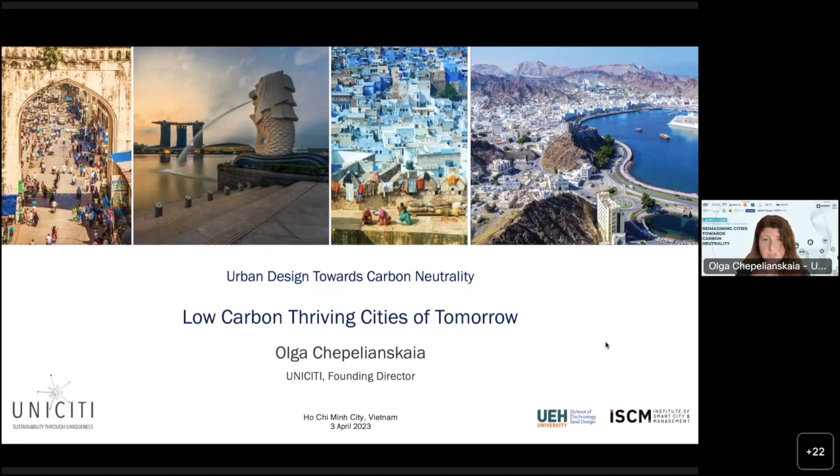To give you an idea of where our experience is coming from, we at UNICITI have worked with about 40 countries at the national level. We started working at the national level before we started working with cities in 2010, and we've covered about 30 cities now across Asia and a little bit in Africa and other places in the global south. At UNICITI, we stand for uniqueness in cities - this is what our name means.

We also have large experience in climate change, both adaptation and mitigation. While working with different United Nations agencies and development banks such as the Asian Development Bank, we could really see that looking in depth into the local context of each city allows it to strongly adapt to climate change, strongly reduce carbon emissions, but also have a number of very valuable co-benefits, such as strong local identity, which attracts tourism, attracts socioeconomic opportunities, and connects people to the city.

These are the points I'd like to develop today. Starting with an important piece of news you may have seen: about 10 days ago, the Intergovernmental Panel on Climate Change released a synthesis report where scientists identified that today the temperature has already increased by 1.1 degrees compared to pre-industrial levels.

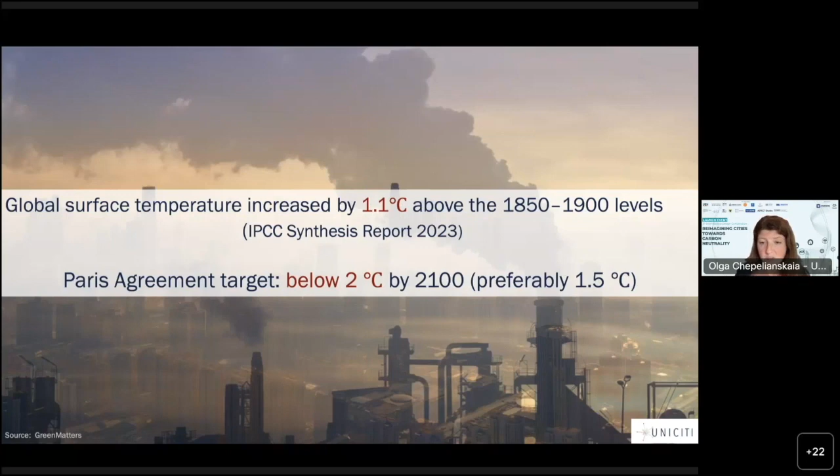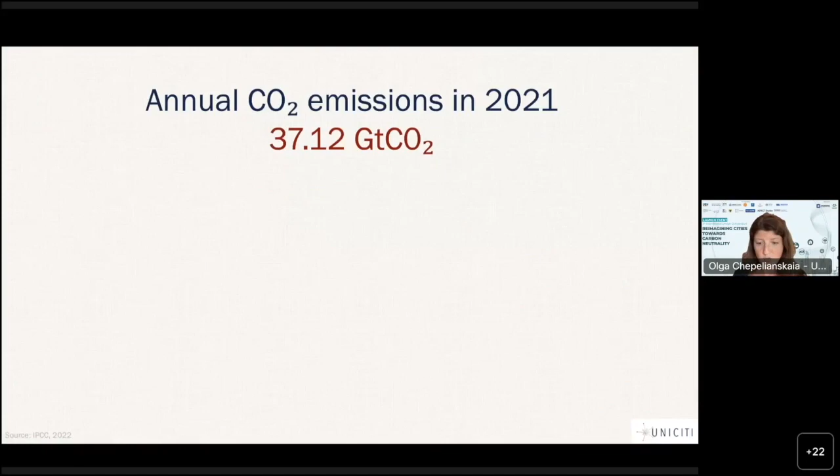Now, where do we stand in terms of emissions? In 2021, the world emitted 37 gigatons of CO2. Believe it or not, the buildings and construction sector accounts for nearly 40% of it - more than a third of all these emissions. This really places us, when we talk about low carbon cities, at the center of meeting the Paris Agreement.

It depends on us, on our sector, to a large extent, to achieve it. Going a little deeper, if you look at just the manufacturing of conventional building materials - typically concrete, cement, glass, aluminum - these materials alone represent over 10%, 11% to be exact, of global CO2 emissions.

Now, where I'm heading, and I'll highlight it later, is that when we talk about low carbon cities, we often want to talk about operational energy in buildings - essentially looking at energy efficient appliances, capturing indoor temperature so there's less contact with the outdoors and we use less air conditioning. All these things are important, but they're not sufficient, because until we continue building cities the way we build them today, we are really not on track to reach the international targets.

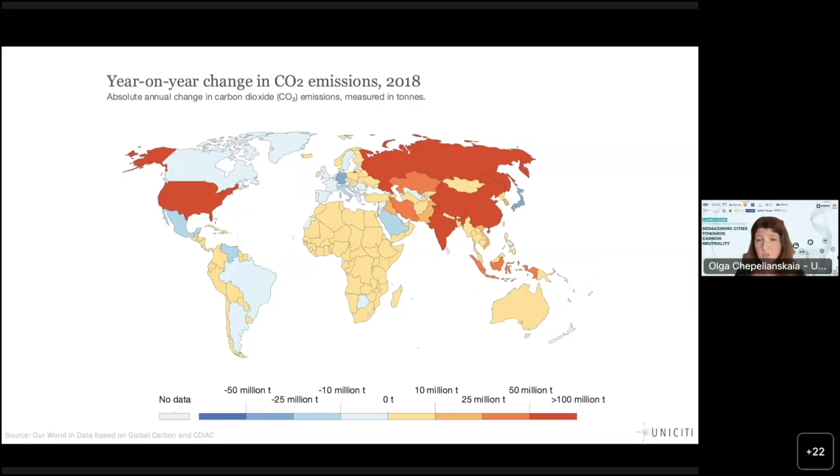Now if we look at Southeast Asia specifically, we see that Indonesia and Vietnam are the countries whose emissions are growing the fastest. So some conclusions to take here in terms of how action is important.

Going a little further into that, Asia as of now is about a quarter of global emissions, but growing very fast. Southeast Asia is about 8%, because of course India and China are the biggest contributors, along with Russia, if we associate it with Asia, since Russia is usually looked at as both Asia and Europe.

Importantly now, since we have a focus on Vietnam today, we can see that Vietnamese emissions over recent years have grown tremendously fast and have become the highest per capita in the entire Southeast Asian region. See how sharp the graph is. There is a little decrease during COVID, but that's a world trend, not related to specific efforts of Vietnam in that case.

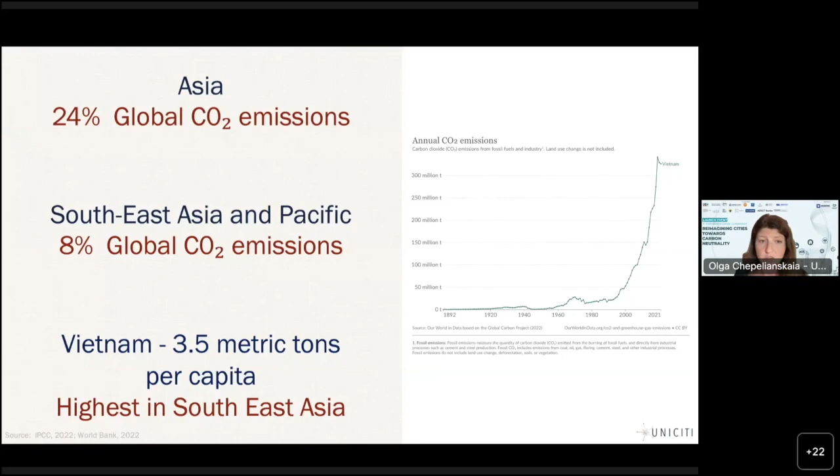This means Vietnam really has an important role to play today in contributing to meeting international low carbon targets. In fact, Vietnam has already undertaken a number of strong pledges, such as the National Climate Change Strategy to 2050, where at the recent COP it pledged to become net zero by 2050.

Here it is very important now to downscale this big strategic target to sectoral targets so that the strategic target can be met. Specifically coming to cities, cities are growing fast in Vietnam, as they grow fast in most Asian countries today. Here is an important data set that you may have seen already on our UNICITI pages or elsewhere, which is quite revealing.

While cities cover only 2% of the world's territory, they are responsible for 70% of global CO2 emissions. So for Vietnam to meet its strategic net zero target by 2050, it's very clear that cities are going to play a critical role in this objective.

Now coming to really one of our favorite topics at UNICITI, because we consider it critical for us to reach those targets. As I said, very often we focus on operational energy. But now let us look, when we talk about the building life cycle, how many opportunities are there for emissions to happen?

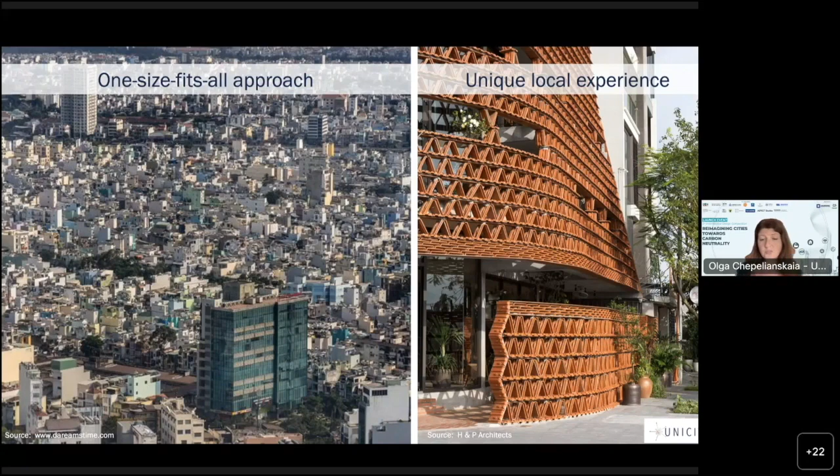I'll quickly walk you through 3 levels of a low carbon city: building level, neighborhood level, and municipal national level. So what can we do at a higher level to support the first two levels? The building level.

As I already started talking about, building materials are really a critical step. We think that without concrete, we can't go anywhere. But until the 60s, many buildings were built without concrete. Over the 20th century it kept increasing, and now we are completely dependent on it. It wasn't like this before. It doesn't have to be like this all the time.

If you look at bamboo, which is extensively growing in most of the global south, it has tremendous potential. You may have heard that countries like Canada and the US are now actively introducing timber into construction and building codes because tests have shown it is safe. I'll touch upon that in a minute. Bamboo actually grows much faster than most of the hardwood you find in Western countries, so this is one potential to activate.

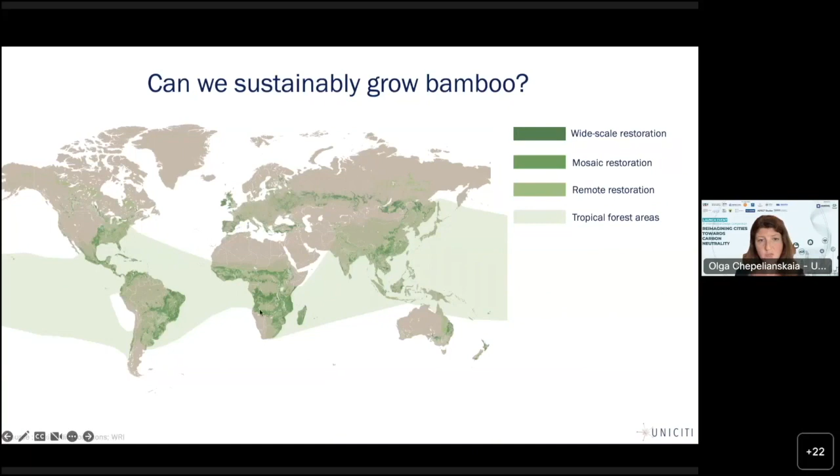Just with soft bamboo, we can't build higher than maybe 1, maximum 2 stories. Even 2 stories needs techniques. And we do need dense environments in cities - we all agree on that. In Asia, people are moving to cities, and people already in cities still lack housing. So this is needed, and this is where we come across the cross-laminated timber technique, or glulam.

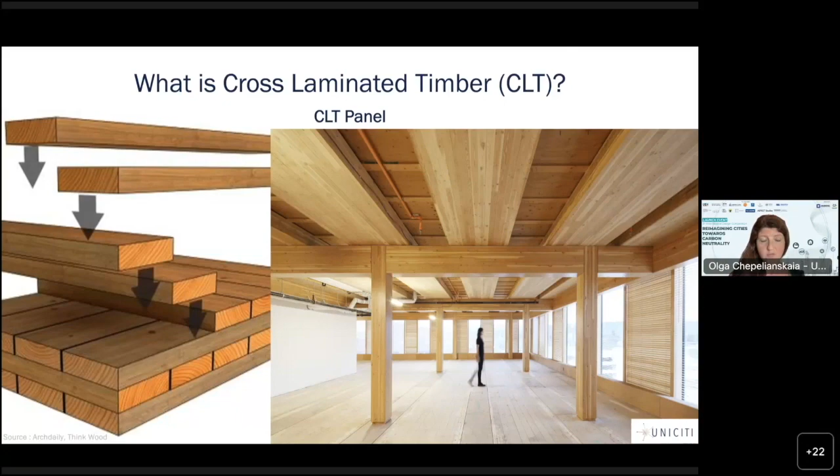We can also do the same thing with bamboo. This is a technique which consolidates timber so that you can build very high-rise. In fact, in Japan a design has been prepared, and I believe construction has started, of a 70-story high wooden building with 90% local timber.

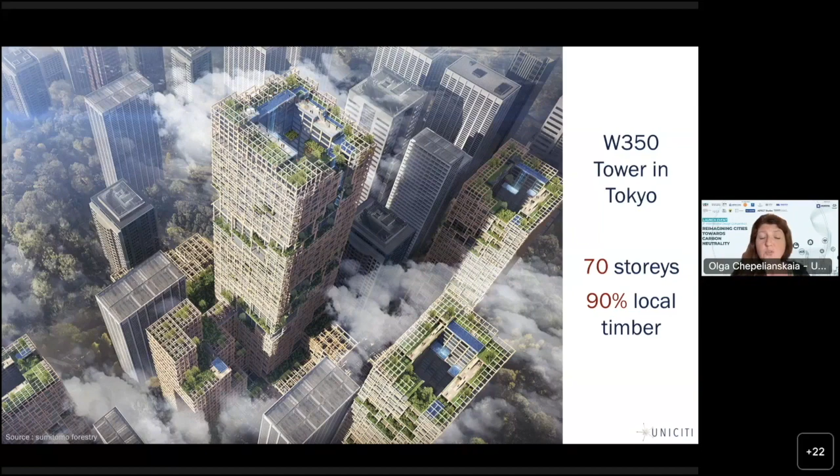So if we project ourselves and have a vision of the cities of the future, we need to see much beyond conventional small savings of energy here and there, and really open our minds to dreaming - to seeing what opportunities we haven't tapped into, and where we can put our effort to really create change at scale.

There is a lot of concern about fire and building with timber being unsafe. A few years ago I came across Michael Green at an event where I was speaking in India. Michael Green is one of the most famous architects building with timber, located in Canada. He shared these facts with me, and I was quite surprised at the time.

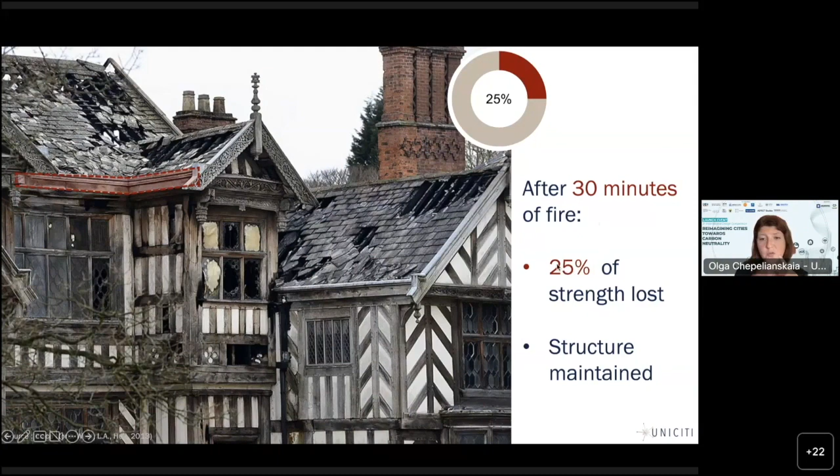Essentially, what he told me is that when a building catches fire, if it's a wooden building, after 30 minutes 25% of the strength of the timber piece is lost. So essentially you get it like this. Now, if you have a conventional building with steel beams, under high temperature they lose their strength.

After 30 minutes, 90% of strength is lost. So for you to evacuate becomes actually much harder than if you build with timber. It's a little counterintuitive, but there's a lot of research done today which really shows the opportunities here.

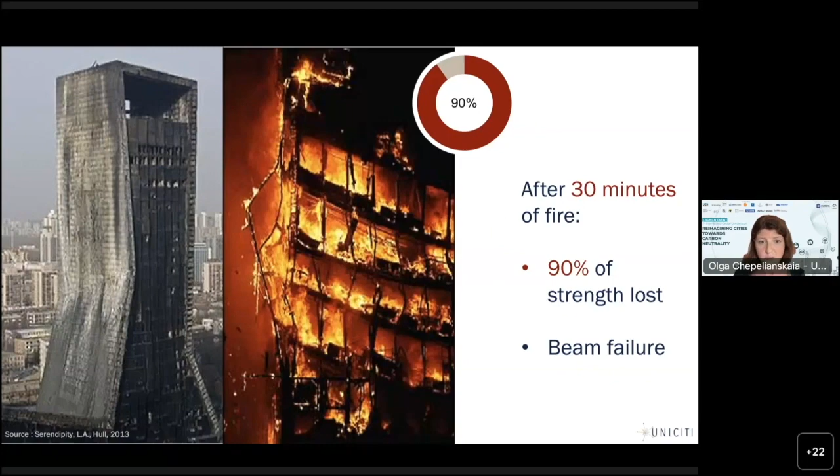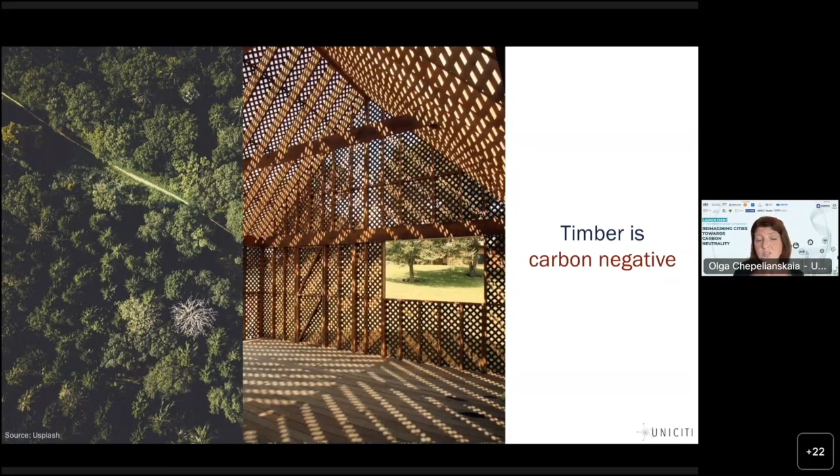And last point about timber, of course also valid for bamboo: timber is carbon negative because trees absorb CO2. So as long as you use this tree for construction, this CO2 remains trapped in the tree and does not go into the atmosphere. So here again, one opportunity.

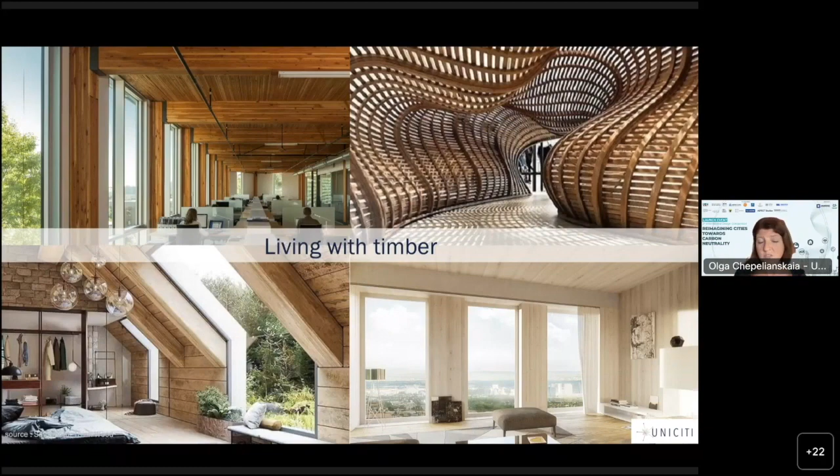And finally, how is it to live with timber? Because more and more now, especially after COVID times, we talk about quality of life. We no longer are ready to just live in a house which doesn't inspire us, which doesn't open up our minds. So living in timber is a completely different experience.

There has been research by the International Energy Agency saying that between today and 2050, we are likely to use 3 times more air conditioning in buildings because of global warming, the heat island effect, and all the wrong things we are doing in building cities.

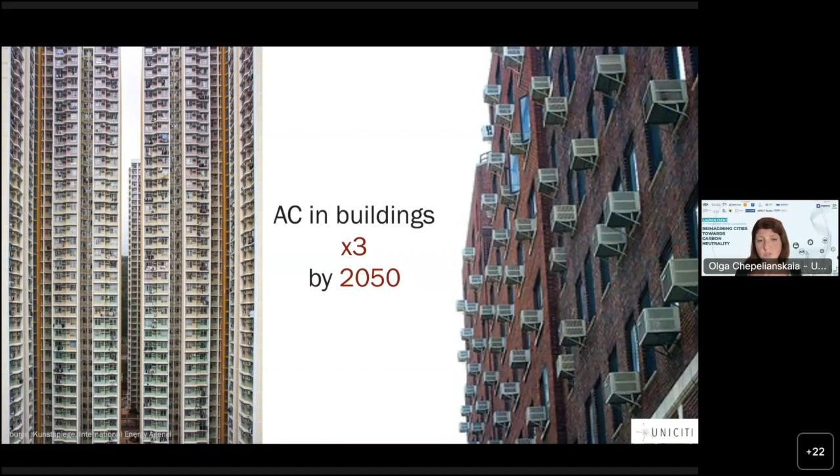Looking at the neighborhood level, I want to tell the story of a neighborhood of Doha, the capital of Qatar in the Middle East. This neighborhood was almost entirely built anew, just a couple of years ago - the project just recently ended. Before this project, the country did a 3-year-long research study on what would be today's architectural language.

This means we don't copy what was done in the past, and we also don't use the uniform language and design that everyone is using with uniform high rises. What can we do differently? So this research led to quite interesting guidelines on the architectural form.

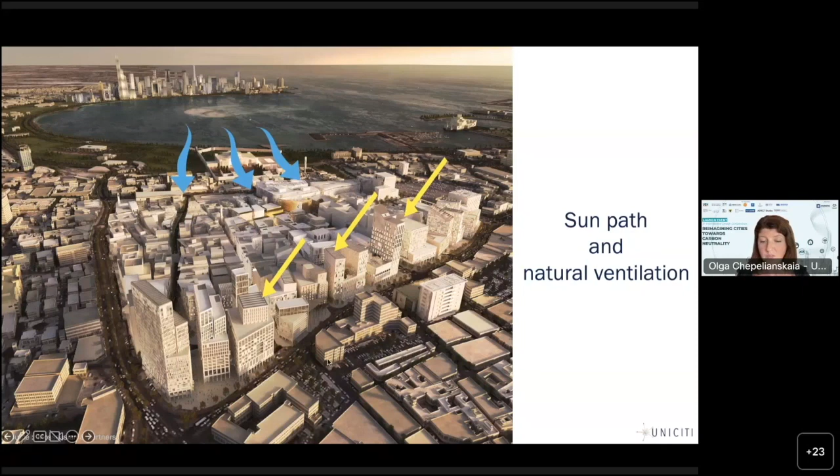When we look at the lifespan of buildings, there was a study we looked at from UNICITI a couple years ago, and it said the life cycle of a building has dropped by 50% in recent years. Because we don't build to last for generations anymore like we used to until, say, the early 20th century. We build because we need housing now, and then we don't hesitate demolishing. This is a tremendous carbon impact, but it's also an experience which is quite traumatic.

I'm sure you see it in Vietnamese cities, I see it in cities I visit across Asia. You constantly have some construction, some demolition, some construction, some demolition. So your mind is not at peace. You are not just wandering in streets and admiring facades. There is constantly some noise, some dust. So, of course, we need to build, but we also need to limit where we can limit.

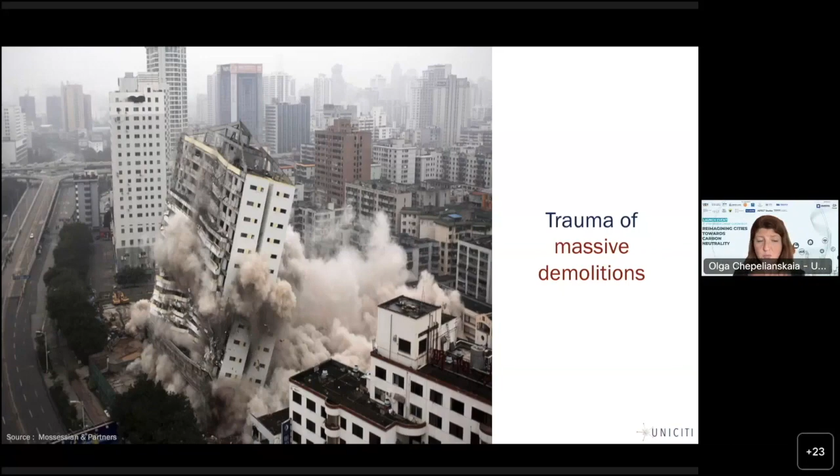Just one project that I want to share, which was done in one of the Chinese cities, which I believe is under construction now today as well, which is essentially a kind of flexible bamboo city. So here the principle is that you build in such a way that you can always adjust and add additional floors or create additional public places depending on how many people live there.

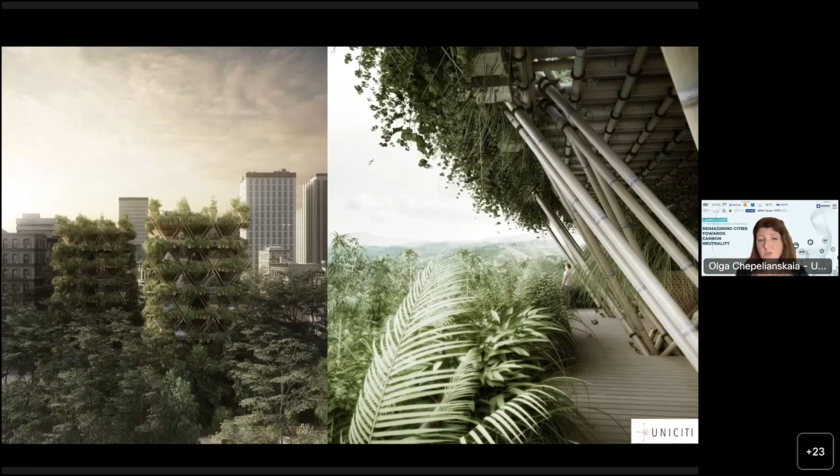There are very few projects such as this one as of now, but again, it opens up our minds. Instead of thinking of this constant construction demolition cycle, how do we go out of it and create something much more sustainable, but also fitting our needs?

But then, on the contrary, there are heritage buildings, because it's still quite hard to find examples of that local context tailored construction at scale. There are some cities such as Singapore, which is quite a great example actually, but not many in Asia as yet.

But we can see that each experience is something unique, to which people get attached and to which visitors also come. And so when we talk about Vung Tau being a tourist city, it's very interesting to see how we can create this identity, which is low carbon and which also appeals to citizens and visitors.